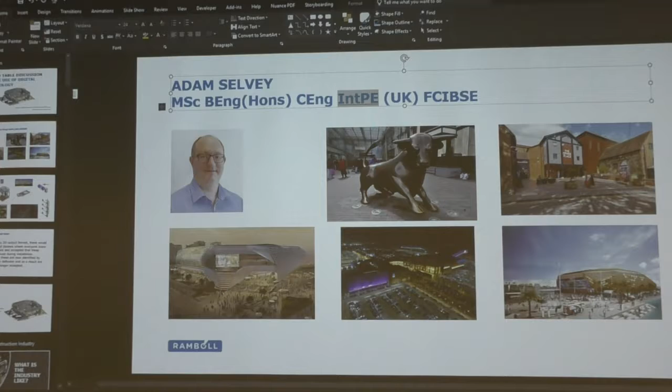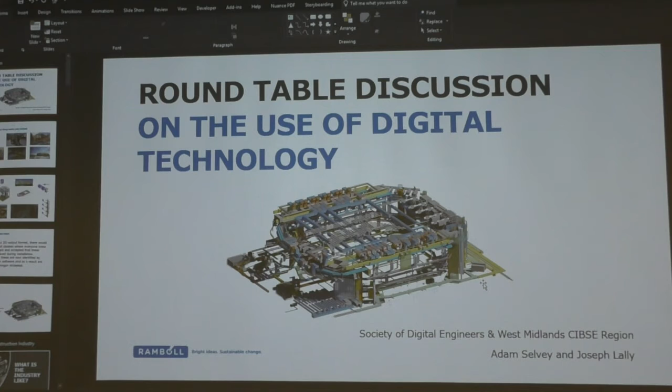This is an unusual event. It's a roundtable discussion rather than just a presentation. So as I just mentioned, it's a two-way event, so feel free to dive in. Presentation, roundtable discussion on digital technology. So it's presented by Adam Selvey and Joe Lally.

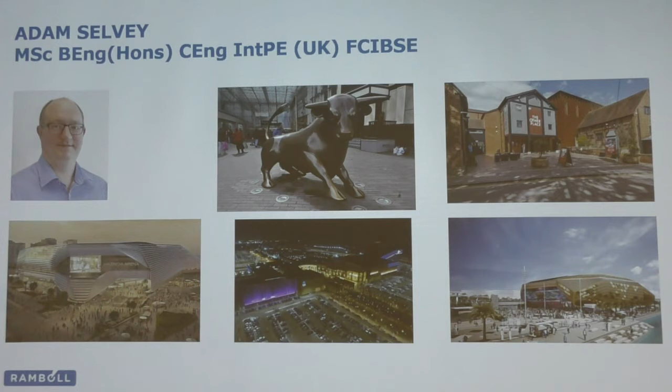So, right, I'm Adam Selvey. I'm the Building Services Design Excellence Lead for Ramboll in the UK. These are a few of the projects I've worked on. Some people know some of these projects. This was done back in 2008, and it's where we started to use some Revit and digital techniques in the project, all the way through to my latest project, which is working across borders with Spanish consultants, German structural engineers, Spanish architects, UK architects, to deliver an arena.

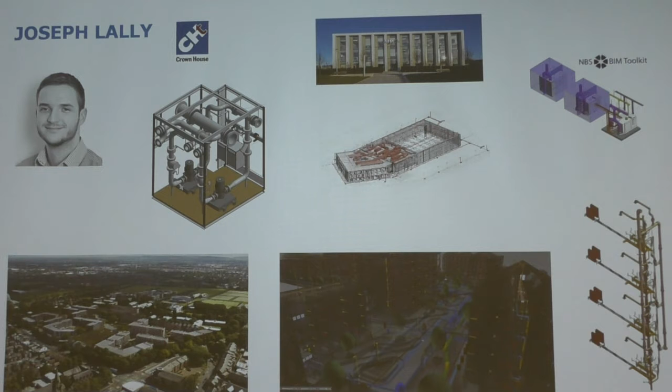Hello, I'm Joe Lally. I work for Crown House. So the plan here is to have it coming in from both sides, from the consultant world and the contracting world. These are some of the jobs that I've worked on. Right now I'm at Crown House, and we get heavily involved in DFMA, so obviously coordination is a key part of that. Everything needs to be right if we're going to manufacture stuff. But prior to that, I was an associate at BDP, so I've seen it from both sides, coordinating as part of the consulting team, but also now coordinating as part of the contractor team.

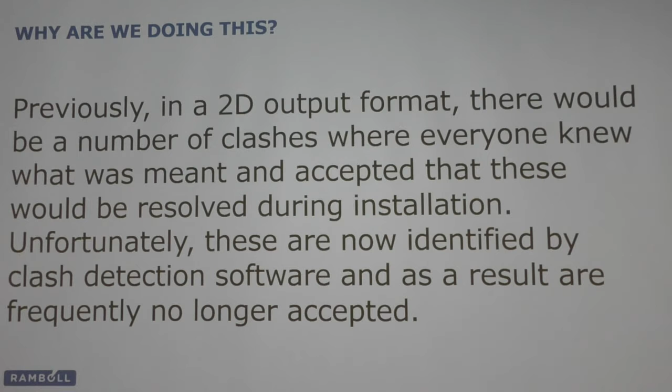So what are we trying to achieve? This is a statement taken from BG6. Hopefully people have read BG6. We might not necessarily read all the documents on a regular basis, but I think it goes to show that we've transitioned from a 2D world, and three of us were having a bit of a heated discussion on this earlier on, into a 3D world. In the 2D world, we used to accept clashes. Not all clashes, but we used to accept clashes, because there was a degree of interpretation of the drawings, the stuff that could be delivered and finished on site.

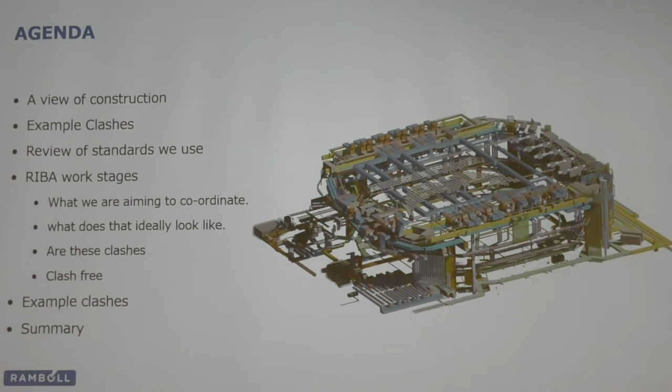But we moved into a 3D world, and those clashes get brought to everybody. So just hands up if you feel like when you worked on a 3D job you've ever been smashed over the head with a clash detection report, because I would say I have. Yeah. So that's the premise of this. We're trying to see how we can work together better and not be smashed over the head with a clash detection report every time on a job. So we've got some example clashes, some standards we use, some guidance in the work stages, some more example clashes and a summary. So hopefully we'll go through.

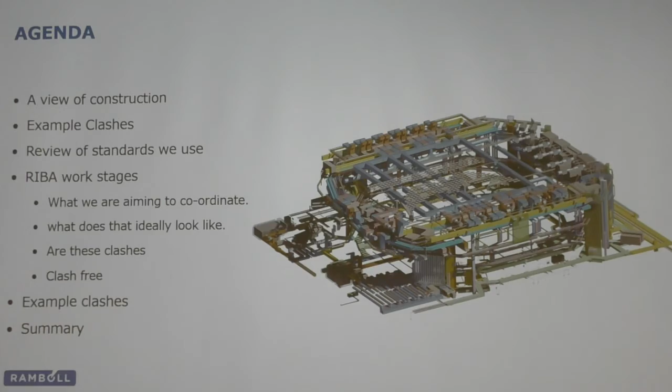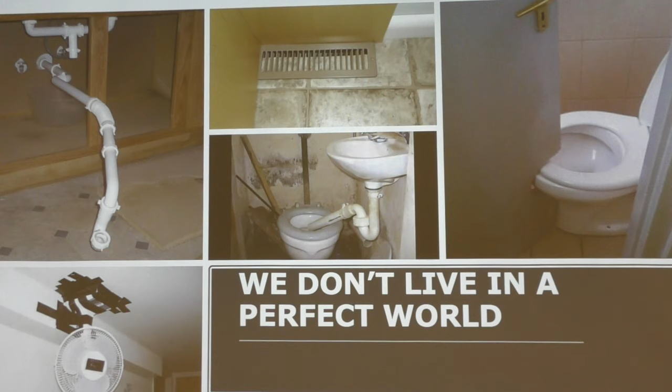As we talked before, is the BIM lead person employed on the job who's doing the clash detection report just using that to overpower everybody? They think we live in a perfect world. We don't. We live in a world where nothing's perfect.

These are a few of my jobs. Joe and I always have a chat - we often forget we've got this perfect BIM model that everybody aspires to, and we forget what's on site - someone hitting stuff with a big hammer. So we've got some example clashes to think this through, and it's really an open discussion of these things.

Is this a clash? Is this wrong? You may want to explain it. At the moment we've got a load of smoke detectors, lights floating in the middle of nowhere. Ceiling devices floating in the middle of nowhere. Should we have a vote?

You asked two questions there. I'll take you up on that. Go on then. You said, is it a clash and is it wrong? The answer is no, yes, in that order.

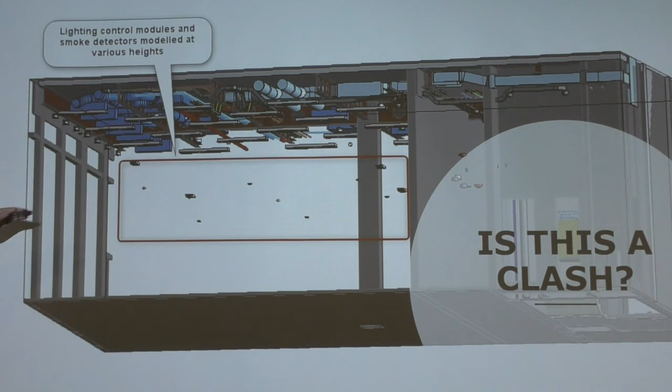You could argue, depending on what you're using the model for and how you're actually going to convey that information, if that's a 2D plan and you're just issuing it out the door, it's not wrong or a clash. Because if you're just viewing the 2D element to install the drawings, it doesn't really matter that those are floating to some extent. But everybody's running around - I do agree that in a 3D model, when you look at it drawn, it's bad working practice. But just because it's bad working practice doesn't make it wrong.

I think it also depends what stage of the project you're at as well. You know, if we're at construction, we're trying to build that. You need to define what the purpose of the BIM model is, I think.

Is that a clash? So you can see there, the duct comes through a hole. The hole's really big, but the ducts - what's the context? What's the stage?

Even at the stage, let's say stage 4, and even if you're trying to some extent build it, for an as-built it might be wrong, because you wouldn't be able to install it like that. But the reason I ask, on site, is prior to fabricators coming on board, some structural consultants weren't setting holes out.

I think that the thing we've got to do is make sure that the contractor and the architect, in equal measure, have a sensible expectation of what they're paying us for. Because what we, as consultants speaking to the consultancy platform, what we're not doing is producing installation drawings - unless we are contracted to produce installation drawings, and there will be those exceptions. But in general we're not, and we haven't got the fee or the time. We'll come to scope and fee in a second.

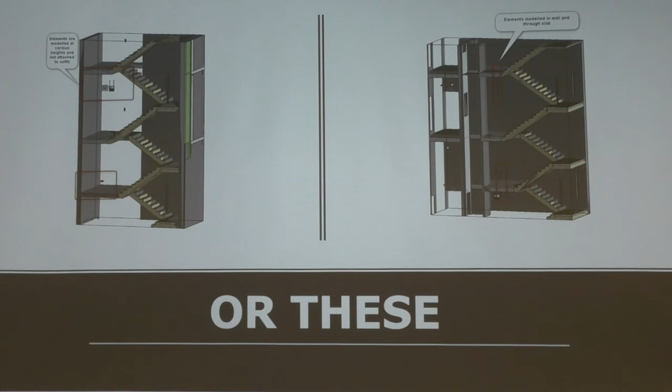Question I would ask - are we prepared to defend ourselves? If we issue these models and we get hit over the head with a clash report, are we actually geared up to respond and win the argument, not just respond?

Can I just ask a question? You talk a lot about clash detection, but a lot of that's just coordination. So for the rest of the evening, is this purely clash detection, or is this coordination? It's a mix of both - a mix of clash detection and coordination combined.

Yeah, so you may find that if we went back to the one where the hole was through there, that's both clash detection and coordination. The question really we have is how

armed do you feel to be able to hold your ground and not be whacked over the head with a BIM model that someone produces a list that says you've got 500 clashes in here, and then you spend your time running round chasing the mythical clashes, which then also has a problem, because a clash really isn't just, as you rightly said, a clash just isn't necessarily, and we've got some good images later on, a clash isn't necessarily an MEP problem.

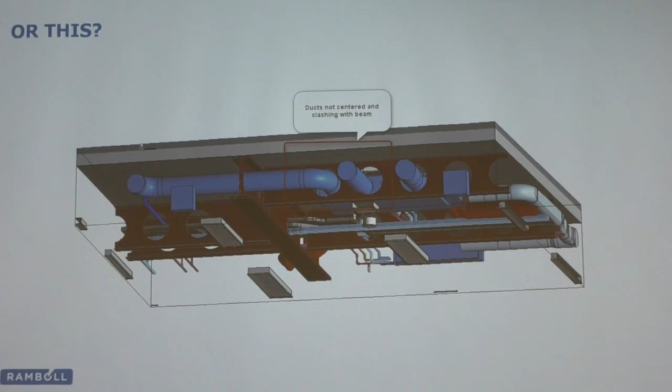But because the MEP clashes in everyone's mind, because the MEP clashes with the steelwork, yeah, it might well be the hole's in the wrong place.

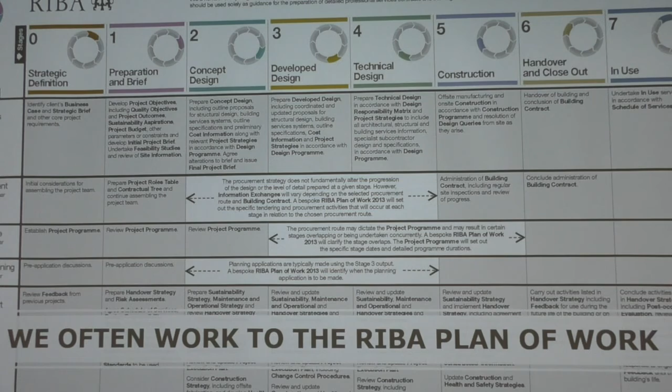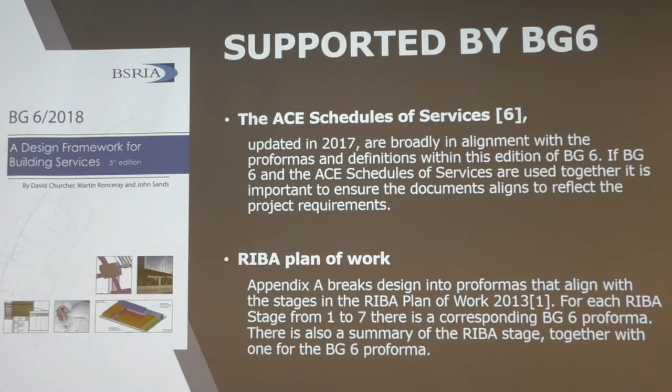So we're all familiar, we all work to the RIBA Plan of Work, fairly standard and laid out. But BG6, obviously from an MEP perspective, a lot of people in structures and in architecture say that this is actually a lot better, a lot more detailed, and a lot more robust than what they have. But it's backed up by, and I didn't read this until recently in its whole, it's backed up by ACE Schedules of Services. And I recommend everybody to just pick it up and read the ACE Schedules of Services, because it's quite interesting about some of the things we do that aren't standard. So here's a question.

It says here what the ACE say about clashes, and it says for technical design, provide technical design stage information that demonstrates resolution of all clashes between architecture, structure and all services where they have a material impact on construction, operation or maintenance of the work.

I'm going to ask the question because ACE gives it in like base services and optional services. For stage 4, is this base or optional? So hands up if you think it's what we should be doing as standard. Stage 4 in 2018 terms being 4C.

Yeah, well just to state it, there isn't a split in ACE, 4C or 4B or whatever, there's just stage 4 in ACE terms. So do we think this is what we should be doing as standard?

It's not, it's an optional service. So it just goes to show, is our perception because we're not picking up our documents on a regular basis to read them, and I'll explain something in a bit when we do get to stage 4, what BG6 says. I'll come to BG6 and talk about how that sits, because we've got comparisons of each stage to try and talk through some of these things.

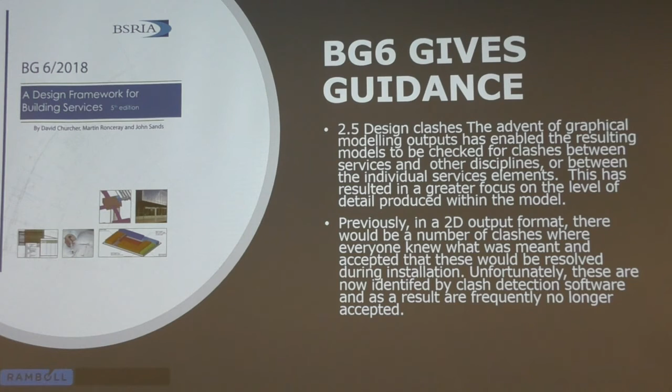So again, BG6 gives guidance, we talked about the 2D to 3D in there, and it defines a clash as two elements in the same space, not requiring installation or maintenance space allowed. So you don't necessarily pick a clash up in a clash detection report if you haven't got the maintenance space, but BG6 is saying it has a clash against it.

We used to, hopefully this is pretty good in terms of the amendments that were made by the BG6 guys when they wrote the digital elements into it, but it talks about clashes in critical, moderate and allowable.

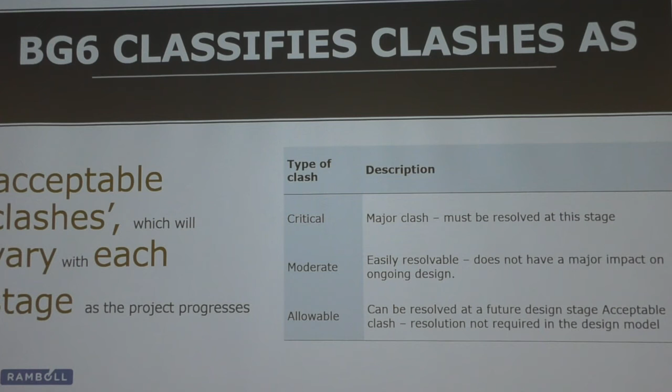Yeah, and that's useful as a tool for you to kind of stand behind, because it gives you those sorts of descriptions against them. It gives you a bit of guidance about the typical types of clashes you're going to get at each individual stage, and whether they're acceptable or not acceptable.

But one of the things we kind of forget when we talk about the site stuff is our family are all plumbers, electricians and everything else, and they always interpret a set of drawings traditionally, and we talked about whether you've got DfMA and that gives a slightly different spin on things, but a plumber or electrician or a fitter took a set of drawings, 2D plans, and interpreted them. So you wouldn't necessarily get exactly what was drawn on the layout, because the layout might be slightly different to the constraints that are on site.

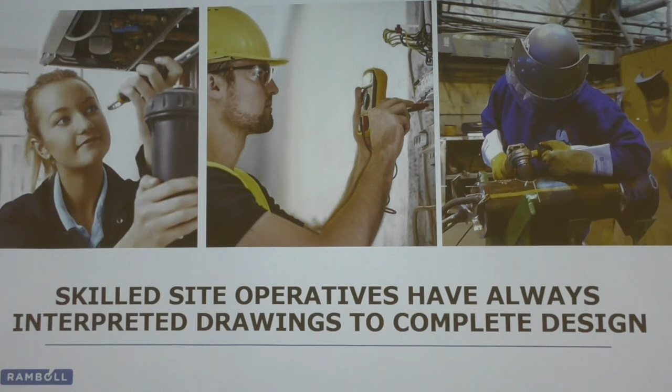We're getting into this world where we're spending all this effort coordinating these BIM models, and then those drawings go out onto a muddy building site with a guy with a hammer. I think we just need to focus, rein it back in again, look at the standards, think about what's important, and put the right people in the right place at the right time. Focus on what's important.

That design - let's call it design - that the sparkies and the plumbers and everybody else was doing, of routing stuff and making interpretation of those drawings, we're almost trying to de-skill some of that with a BIM model, because you're telling them you've got to install it that way, and it might not be the best way in that situation.

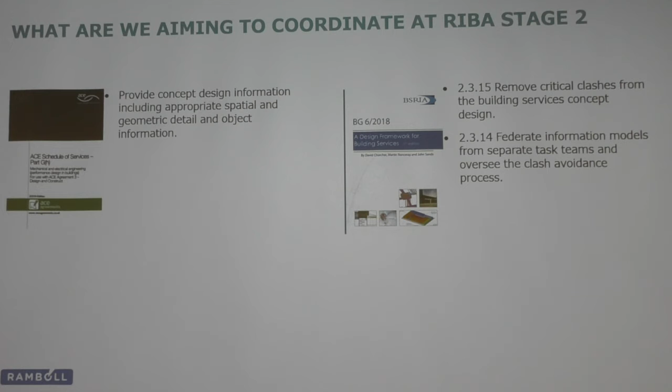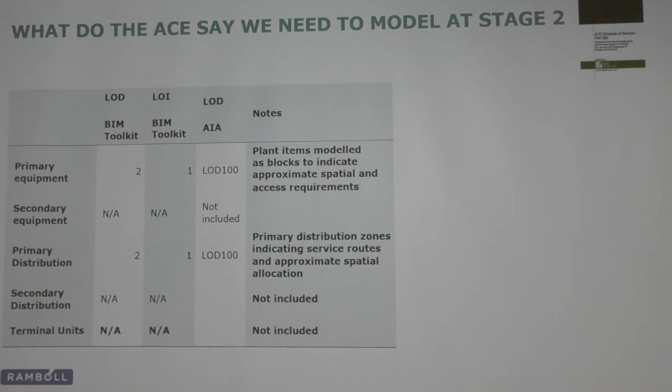Concept design, it's fairly straightforward. So ACE - this is where we've got the two different scales now - is asking for providing concept design information appropriate to spatial, geometric and object information. BG6 again talks about critical clashes, it doesn't talk about the other two levels of clashes. It talks about critical clashes being removed, and then federating the model. This is a useful table in ACE of the level of information you're supposed to provide, what you're supposed to model, what you're not supposed to model contractually at the given stage, which we know because we've got an example on BG6 and examples of other risers.

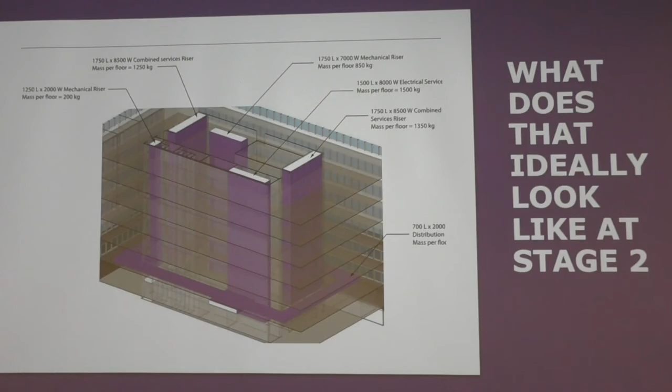So clash detection or clash resolution at stage 2, I would argue you don't want any clash - this is when we talk about when it's relevant to start bringing in clash detection reports. You wouldn't be wanting to bring any clash detection reports or even use it at that early stage. However, I've seen BIM managers of sorts looking over a whole project multidisciplinary, still trying to bring in clash detection reports at this time.

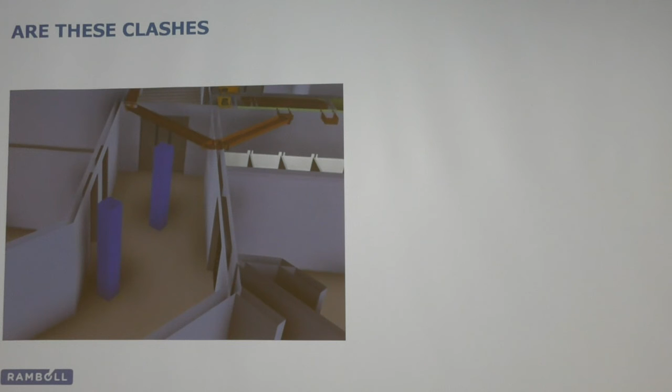And if the structural engineer came in and said, actually, guys, we need to change something, little tweaks here, not worry about that, but maybe a fundamental change of grid or whatever, for whatever reason. At that point, with proper project management, someone would say, we've got an issue here, do we want to proceed, do we do an instruction for it?

The problem now is everything happens so fast that drawings get changed. A new model gets sent in, the BIM manager loads it into your model, people are still working away, and they go, hang on, that column's moved, I'll just shift a bit of that work. And an awful lot of time gets taken up reactively changing things to something which may not actually be finally adopted.

We're going to move through stages as this presentation goes on. I wonder if this discussion's better for the change element of this, and maybe move on a little bit. Change control and the process of costing it has kind of gone out the window because everything happens so fast. But at this stage of design, concept design, you should be playing together to try and get the right integrated solution.

Can I just say very quickly, with the use of BIM, the trouble is that people are going into far too much detail too quickly, trying to model everything, all the crossovers, far too early in the process. Maybe take a step back and at early stages just work volumetrically so you can adapt with the ebb and flow of the design change.

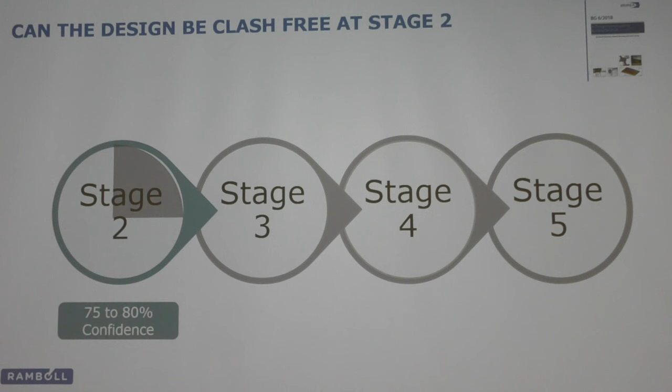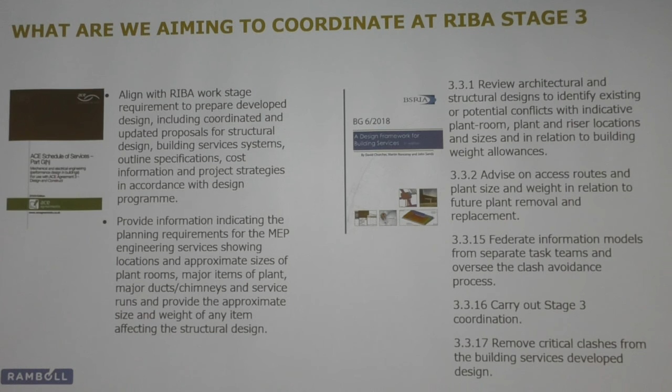And the question is, can it be clash free at stage 2? I would argue it's not necessarily going to be clash free at stage 2, because people don't necessarily give you the total envelope you need. So stage 3, again, space, volume, and you start to allow a little bit more detail on the major plant routes and space planning. But again, BG6 is only asking you to remove critical clashes in the design. It's not asking you to remove every clash. It accepts there will be clashes. It tells you what you should be modelling, so no terminal units, which aligns with the drawings we get in BG6.

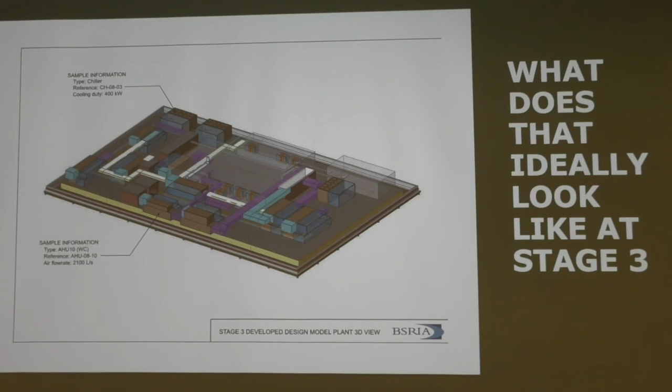I can vouch for this one particularly. It's a really well drawn drawing. It's a beautiful drawing. It is, yeah.

But in a clash detection report at stage 3, it's a clash. Everyone sees it as an image, and someone says, "Why have you done this?" So, personal opinion, I don't think it's fully appropriate to be using clash detection reporting at this stage. You will get clashes. The question is, have you looked through the model, seen where the stuff is, and know how to resolve it? If you don't, then you've got critical clashes. Does anyone disagree and think these clashes aren't acceptable?